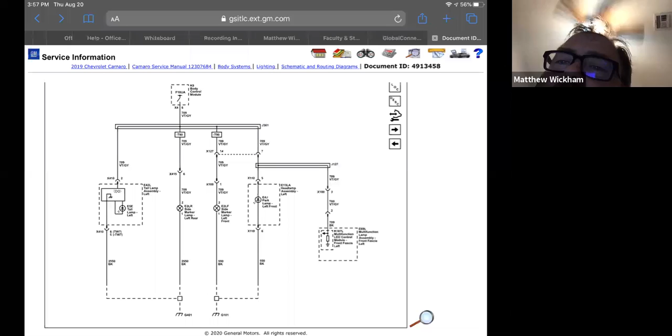You're going to see me draw on here. I'm going to start with my red highlighter, and I'm going to highlight where my power comes from. So as of right now, my power is coming from the body control module.

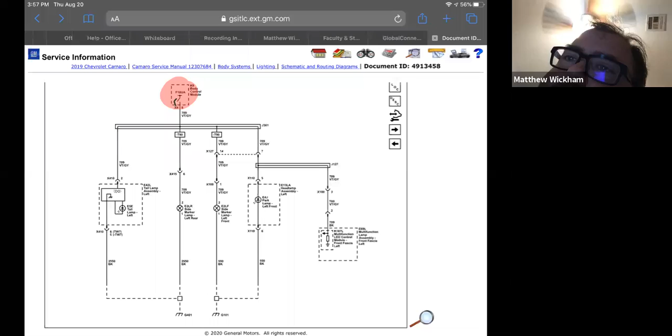I'm going to do a little black pen mark real quick, see if I can show you something. This is a switch. Okay, that's a switch. What that means is it's not on, and it's drawn in its normal operating position. My side marker bulb is not going to function until my body control module tells it to turn on.

That F18UA right there at the top is actually the fuse for this circuit. What's going to happen is my body control module is going to give me power, and it's going to come down here.

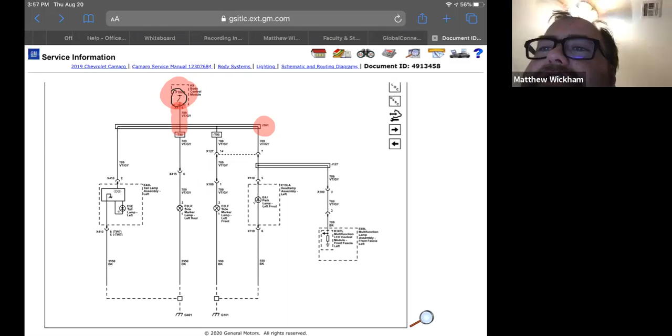This right here is a splice or a junction. Actually, it's a junction - J is for junction. J301, that 3 stands for a location in the car, and so on and so forth. So my power is here at this junction. It's going to come over here, and it's going to come over this way.

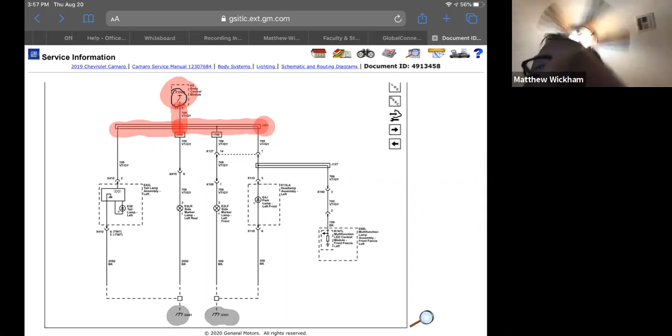Now I'm going to go to the black highlighter real quick and highlight my grounds right here and right here. Okay, those are my grounds. Also, I'm not sure if you can see it, but this is a ground and this is a ground.

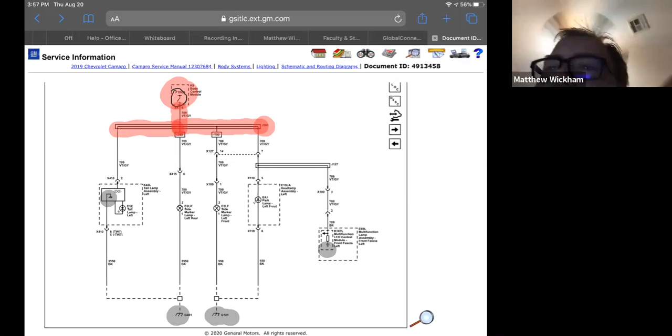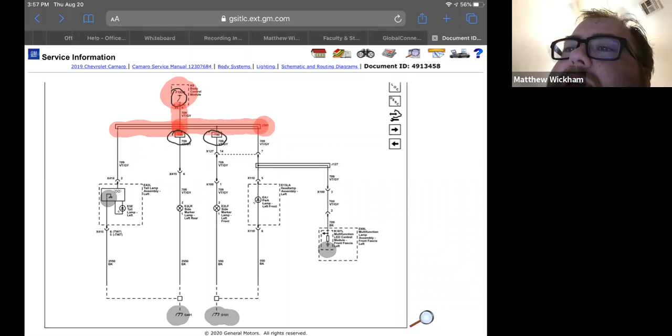Those are ground symbols. Now, there's a few different circuits on here, it looks like. The reason I know that is I'm going to circle them with a pen in black right here. And it looks like it's a minus T90 - that's going to be an RPO code. So this is without the T90 RPO code.

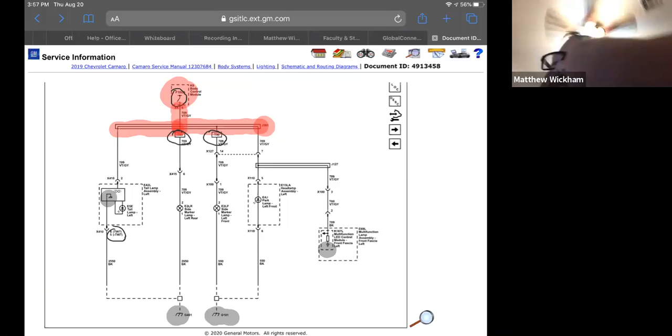And then over here, we have with TWT or without TWT, the same thing. I thought I saw another one - maybe not. Okay, so anyway, regardless, we're just going to keep a look at this.

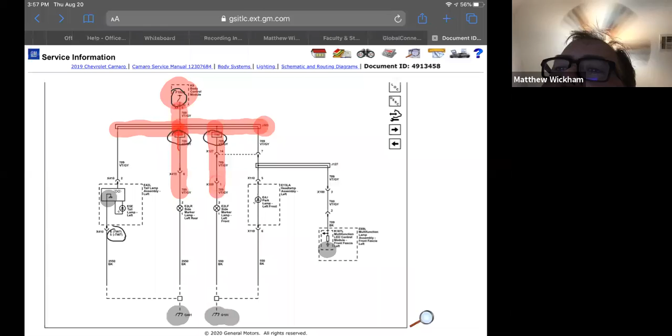Back to the highlighter. So really, my power is going to come out of my junction here, and come down to my side marker bulb left rear, and have power come down here to my side marker bulb left front.

I've also got power coming down this way, comes here to this junction, and it's going to come down here to what we call the multifunction lamp assembly front fascia left. And we've got the power coming down here to the headlamp assembly left.

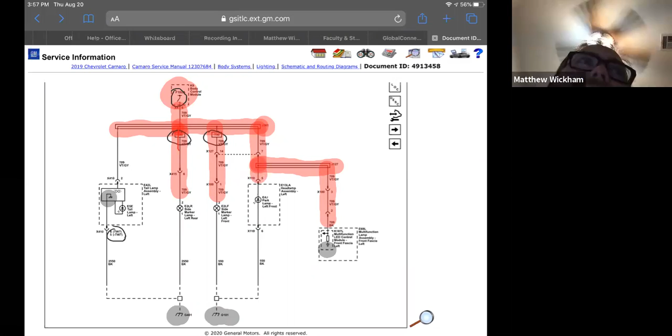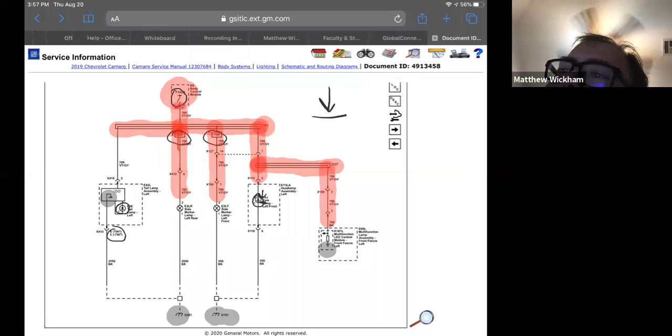All right, I'm going to draw you a couple more circles. This, this, and that are diodes. Basically what that means is, see how there's an arrow going this way, and there's an arrow going this way, and then I like to call this the wall. So really it looks like this.

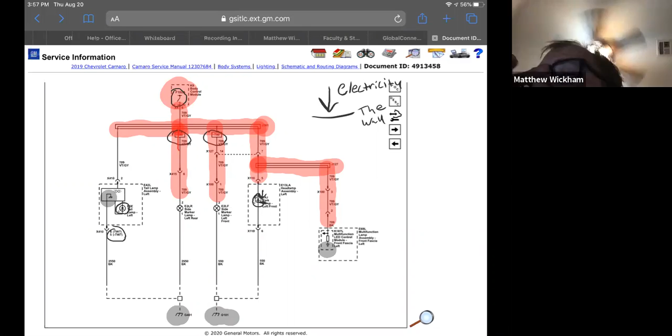Okay, now what I like to do is, this wall is only a one-way wall. So I can go this direction only - I can't go back this direction. This is called a diode. Diodes allow us to move in only one direction.

So in the tail lamp left and the park lamp left front, there are diodes that only allow us to go one direction.

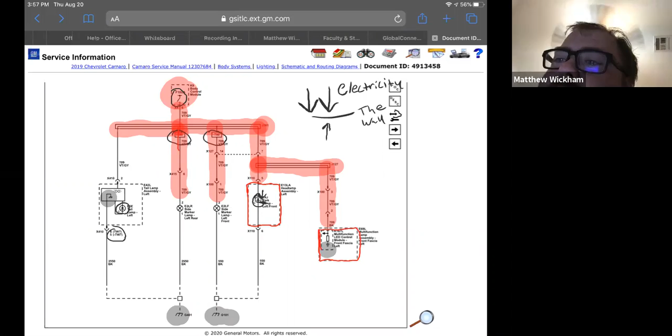Notice that I'm going to trace these. These here are dotted. That means we're missing stuff - not everything's here. Same thing with here, and over here. All right, so that's that.

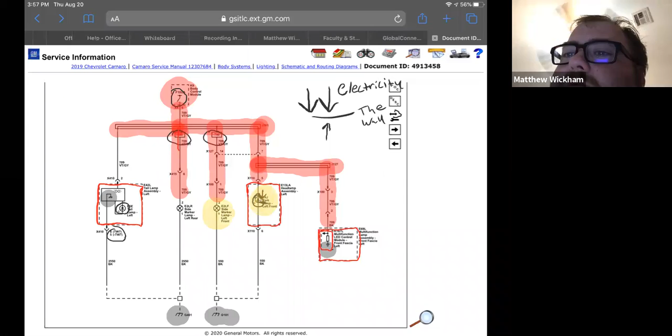But what we're going to do is I'm going to go back to highlighting. I'm going to highlight the loads in my circuit. This is a load. I'm using yellow because these are bulbs. These are my loads in the circuit.

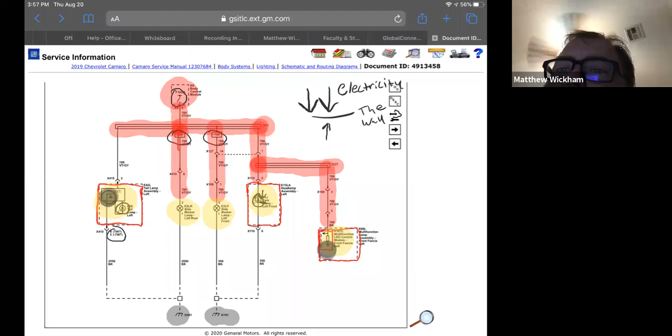Now, go back here to black. I highlight my grounds again. Ground there, and then we've got a ground here, and then my ground's here. I'm going to trace the wires that go to ground.

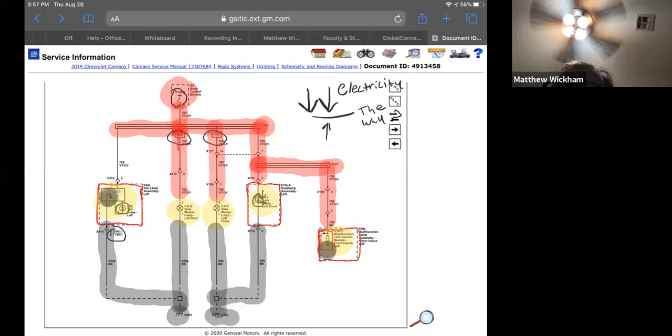All right, so that is a complete circuit from power - B positive. Again, B positive is only on demand on this because of the switch. Only on demand.

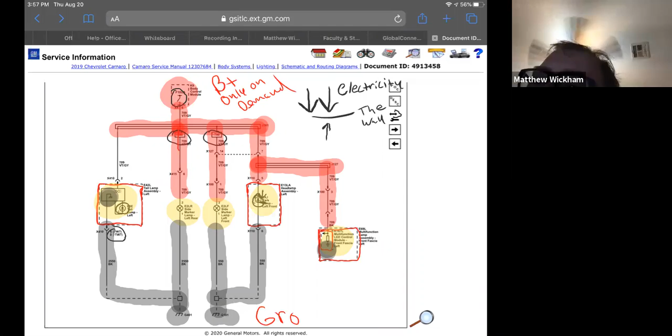Okay, and then this is our ground, and our loads. All right, so that's that. And that's how we highlight an electrical schematic.